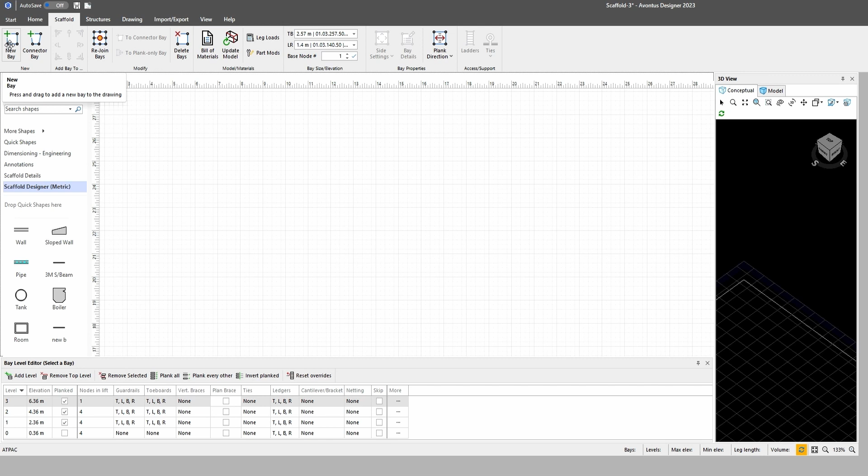To add a new bay, simply go to the top corner, select new bay, click and drag onto your page. This will automatically come out as a 2 meter lift, as well as the size you've chosen up here.

If you change your settings up here, then drag a new bay on, it'll go to these settings. But if you've already added a new bay and want to make it bigger, go into my settings and change it to a 2.5, so it's 257 by 257.

Now obviously when you click off, there's no information here. When you click on a bay, this information will appear - this is everything to do with this bay you've chosen.

I can go in here and add a level. Obviously that's at 3 lifts now, as you can see. I want it back down to 2, so I click on here and it takes the top level off.

All this information here is what is stating within this design here. On your side settings, on your top ribbon, when you click in here, you can turn off your guardrails, turn off your toe boards, add bracing, add netting, and add a cantilever to either side. But remember, when you're using the side settings, this is for the whole bay.

So if I want to add bracing to the left hand side and cantilever it on the T side, the cantilever brackets information's here. So I want a 1 board hop up. If I click OK, now let's look at my drawing.

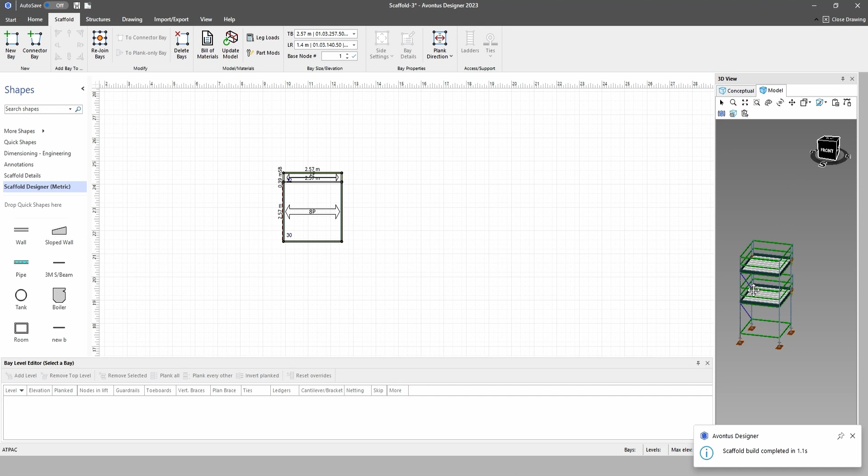As you can see, on the L side I've got my bracing and my hop ups as well, what I've added. So that's the side settings - it's for the whole bay.

I'm going to turn that off now, click OK, so that gets back to normal settings.

For your settings down here, now I have a boarded lift here on my first lift. So what I'm going to do is turn my handrails off on that, which, bear in mind, every time you use a guardrail, it turns off your toe boards.

Now I want every side bracing, and I want a cantilever on the R side. Click OK. And I want netting - I want netting on TLB.

So all I'm doing is changing the settings for my first lift. Let's have a look.

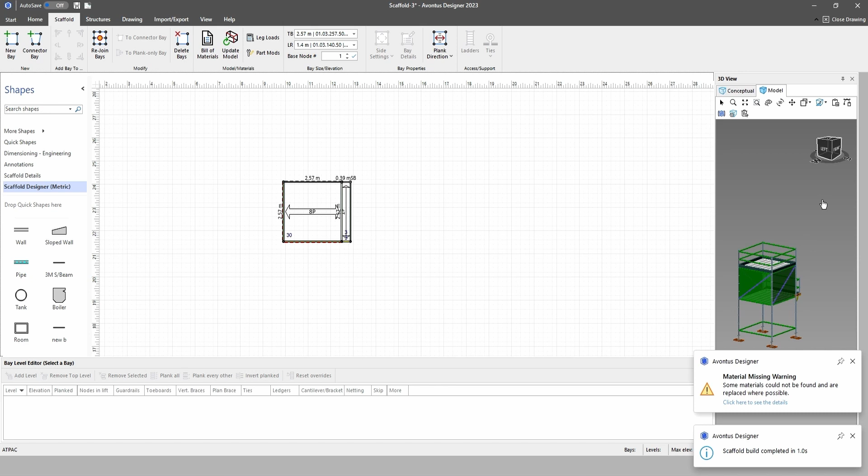As you can see, everything on that first lift - I braced it all the way around, put netting all the way around, took my toe boards off and took my handrails off, and added a hop up.

So everything can be done from this, but what you need to bear in mind is that any settings you change in here will override this information up here.

So if you're thinking, I took all my handrails off, I want my handrails back on, if you go in here it already states that there's handrails, but that's only specifying for the top lift, as you can see. So please bear in mind that this overrides this.

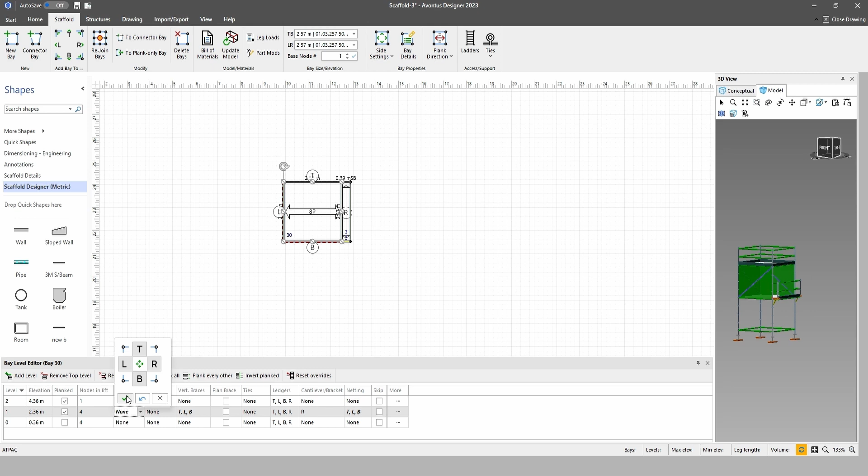Okay, but if you were to change - it's not that one, it's that lift - go in here, click OK. I want to turn all my bracing off, click OK. I'm going to turn that off, click OK.

Turn my netting off. When you click it once it highlights everything, or if you've got certain things already turned off, click it again and it turns everything off. Click OK. We're back to normal, as you can see.

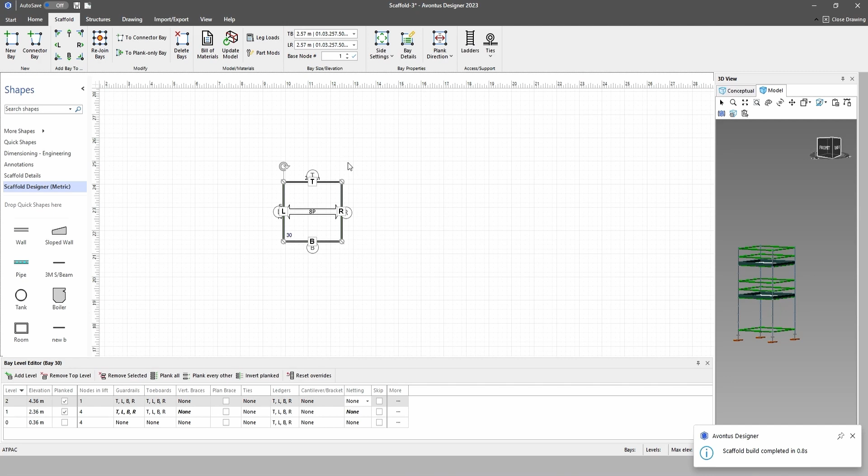Now if I go into here and then turn my braces back on, you can see, because I did bracing the first time on this side here, it overrode - and obviously I've only got my bracing on my bottom lift.

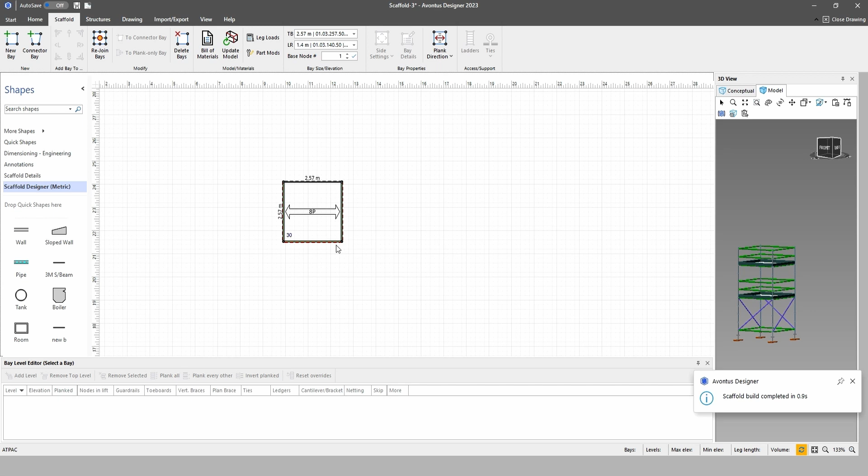So please bear in mind when you come to do that. Obviously now, because I've already overridden this, I'm going to get rid of this.

I'm going to drag on a new bay, change it to the desired size I want. Back to 2.5. So the scenario is, you've got a bird cage you need to do. There's many ways to do it, but I'll show you a basic way which we kind of recommend.

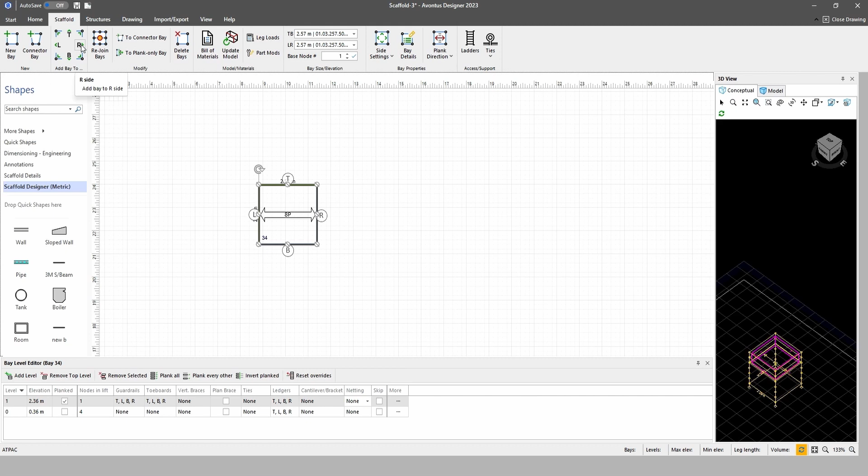Use this feature up here, which is adding bays. I can just click on R, obviously on my R side I want another one. Now on my B side, so that's simply adding bays to whatever direction I want it to go. But bear in mind with this feature, whatever this bay is, it will copy to whatever direction you're pointing to.

So when this is created, I recommend taking it up to the height you're wanting to create your bird cage. I don't need planks on that lift, I don't need planks on that lift. That gets rid of everything. I only want it planked on my top lift.

I'll drag this over here because this is the bay I'm working with. So I can now go like this, add the sizes that I need. Right, so that's my mini bird cage I've created.

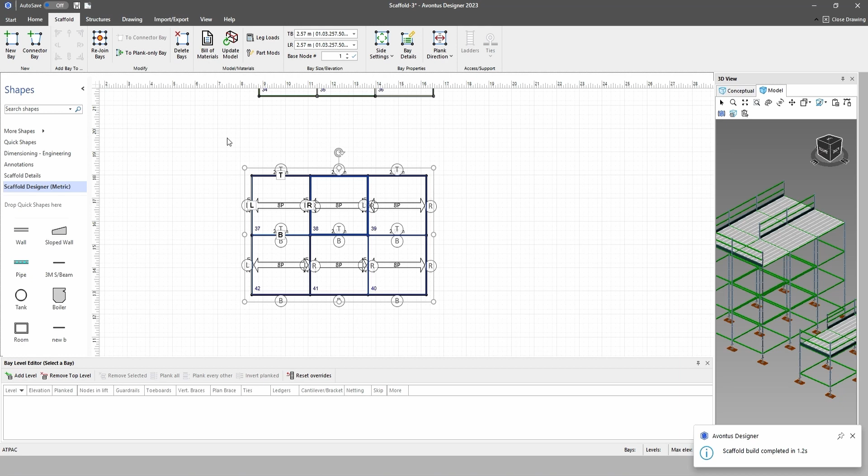So when I go into here now, as you can see, you're thinking well that's a bit of a mess, I didn't want it like that. Highlight everything, re-join bays, back into my model view. And as you can see, it's put my handrail all the way around.

But you're thinking now, well, I need bracing in there. I need bracing in that one. Just simply go into side settings, bracing, and I'm going to brace this one as well. Oh no, can't leave it, I want bracing. Click OK.

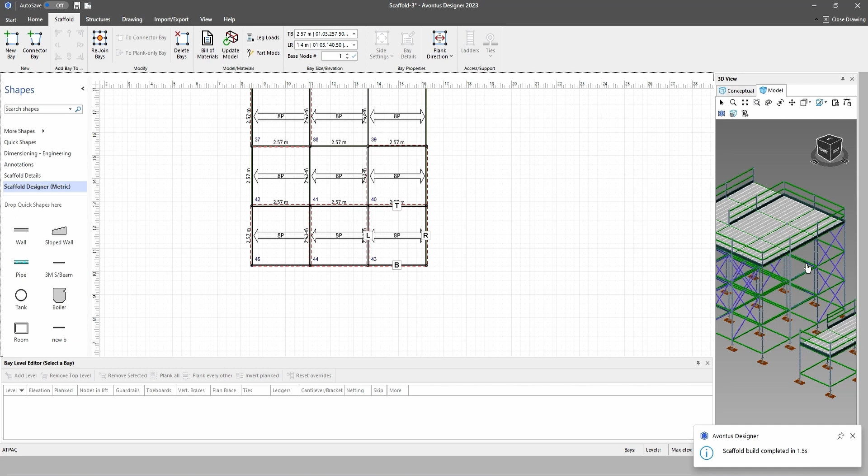So now I've got bracing in this one, I've got bracing in this one. Now, if I were to click on this one and then I was to go, I want another bay there, I need another one there, and that one. Now you have the issue, because I've copied them bays - where are we? I need to be on the back side.

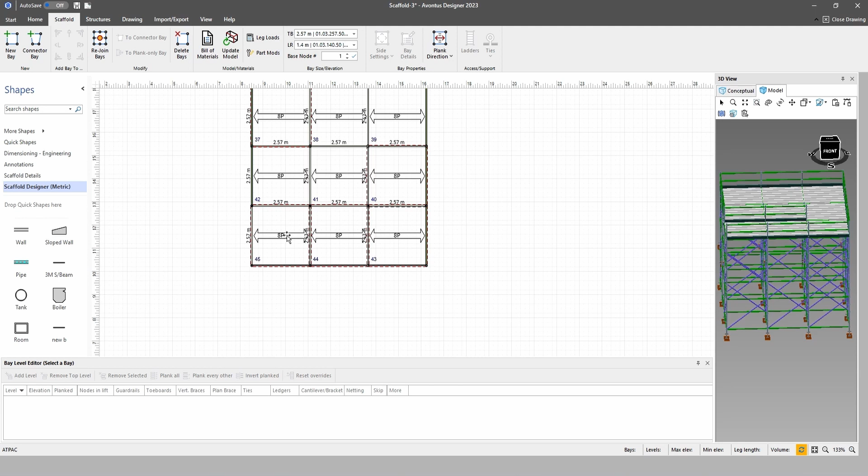So now all these bays I've created, what I've copied, I've got all the bracing in, which I don't want. I don't need it with bracing every bay. So what I'll have to do now, because I've copied all that bay, is go in here and say, right, in this one I don't need bracing, I don't need bracing in that one. It'd be very tedious if you created a really big bird cage.

Bear in mind, this is only a small one. If you made another 30 bays wide by 30 bays, you would have a lot of bays where they'd all be empty. So what we recommend doing then is, imagine this is 30 bays wide, 30 by 30. What I can do is click on a bay here

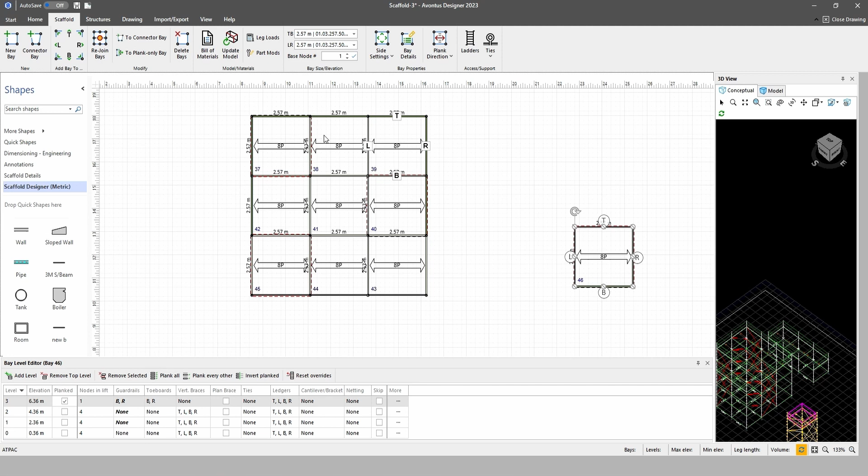and then add a bay, drag this to one side, create this how I want to do with my bracing. So I'll go into my side settings, add my bracing. Bear in mind, all these have got no braces - this one's the only bay I've created with braces. What I would do now is make a few of these, because I'm copying this bay. And then where I need my bracing, like I want bracing in the middle, drag this bay out.

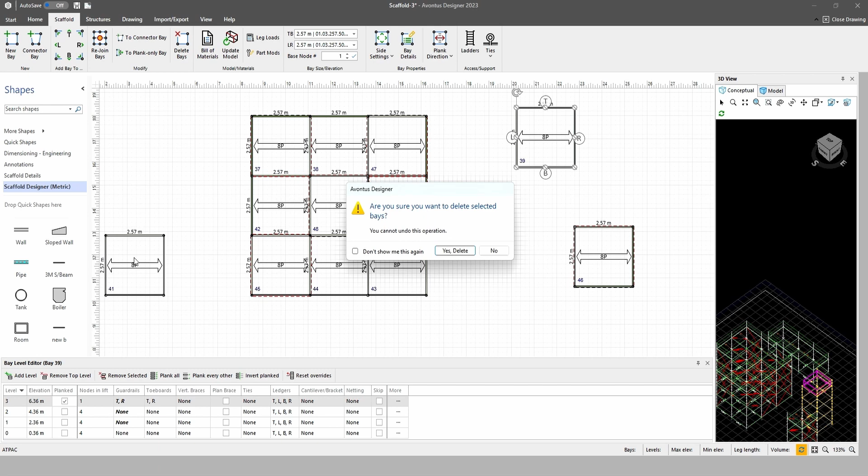Drag this in. Do you understand? So basically all I'm doing is saying, right, I've created these, I need to swap that with that one. Get rid of these bays. So I don't need that bay anymore. I don't need that bay anymore.

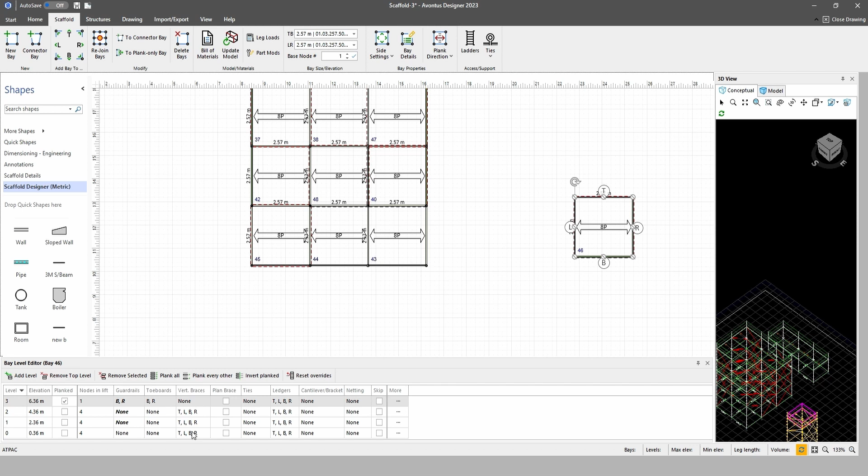Yep, so now I've created my 30 by 30. I've got my braces where I need them. It's just a simpler way than going in and saying, right, I need... Because the scenario is that if you're only wanting bracing on the first lift, second lift, but you don't need any bracing after that, then obviously you wouldn't use your side settings. You go click your bay, and then you go in here and change your bracing to whatever you needed.

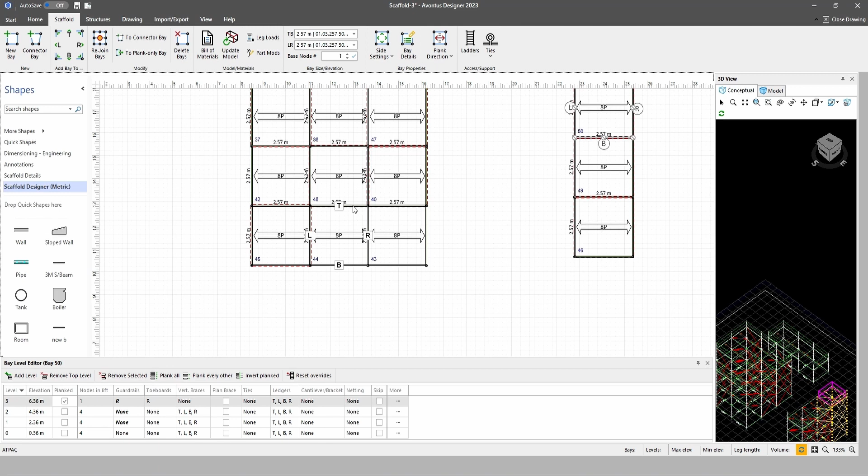So that would be perfect for what you need in here. Then having to click in this bay, change the settings, go into this bay, change all your settings, going into this bay, changing all your settings. You create one, and then all you're doing is clicking on here, using that, making a couple of them, take out what you don't need. I don't need that one, and drag and drop in place. It's as simple as that.

So, get rid of them.

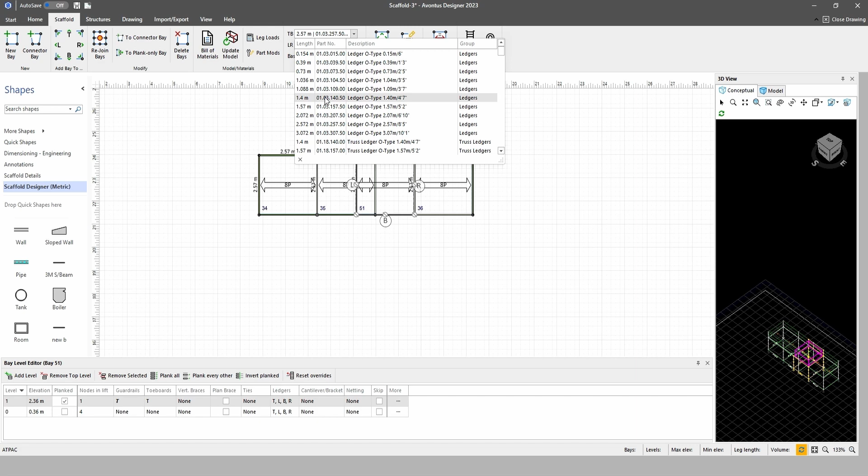So now on another scenario, basically I've got a gap. I've gone round a house, I've got a gap here, and instead of me creating another bay like this scenario, what a lot of people do is go through here and try and find that bay to try and fit within that gap, still not there. 2 meters too big.

Right, so instead of doing that, what you can do, get rid of that. What I can do now, because I've got these two, but I need to make this up here, but I don't know what size it is, I can drag in a connector bay, and then drag that into situ, drag that arm over there, drag that over there, drag that over there, and that over there. So come out of it, I can see straight away that it's blue, so therefore it's added tube and fit to make that gap up.

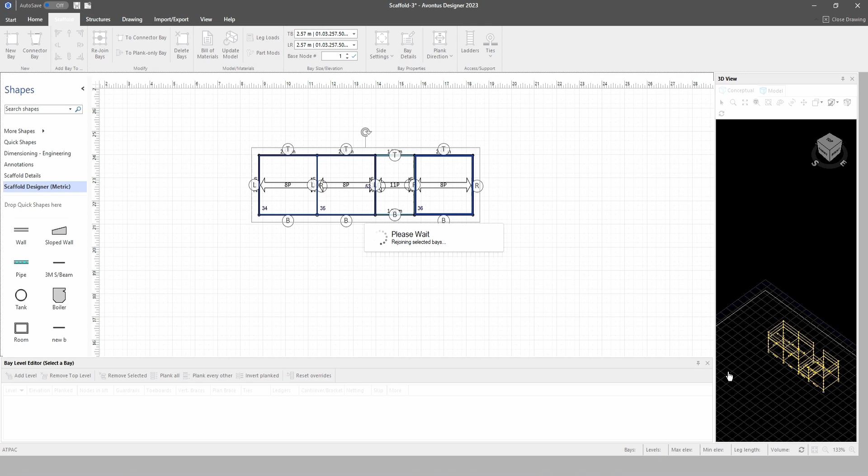Okay, so just click on rejoin, and then let me go in here. So I've made my gap up, but now you're thinking, well, it's way down here, I need it up there. So what you can do, because this will just come in as a standard platform...

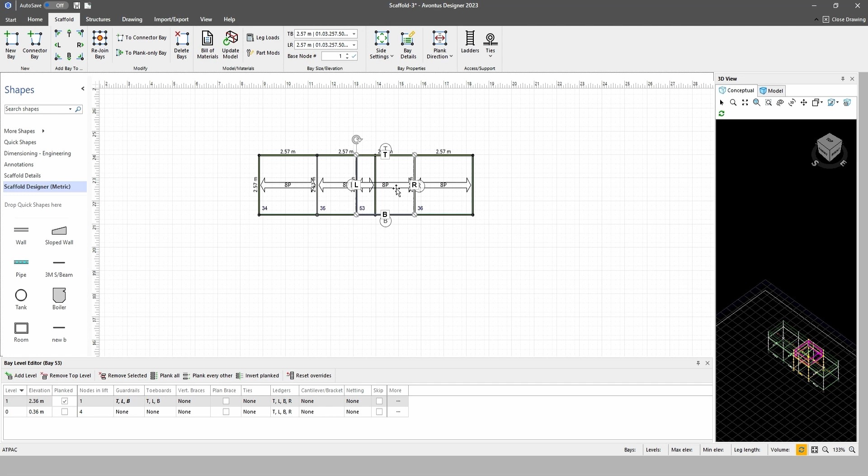Delete that there. I can click on L, drag it away, convert to connector bay.

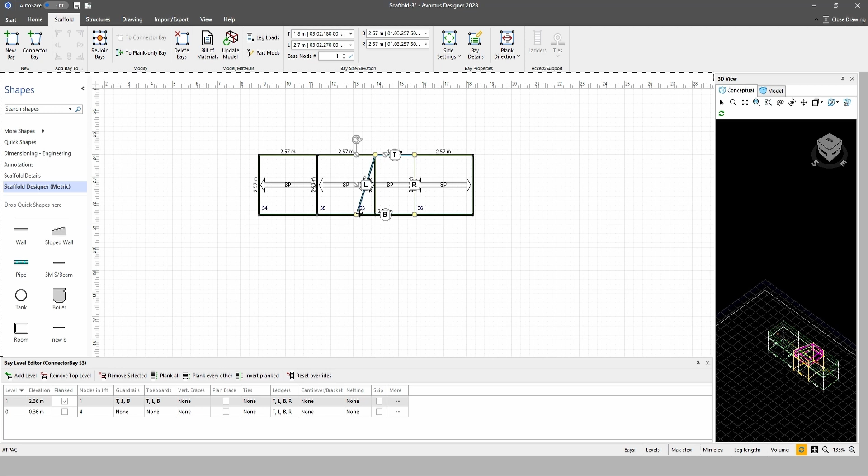So basically that is this here, but this is already at my desired height. I can now drag this into place, click in here, drag my legs in place, and now highlight everything, rejoin bay, go to my model view, and now I have a full bay connected up for what I need.

Yeah, it's tube and fitting, but obviously it's only come up as tube and fitting because I do not have that kit available. I do not have a ledger that is 1.74, so it's put me tube and fitting, but it's created my board level, it's created everything I need to connect them bays up to make that perfect board level.

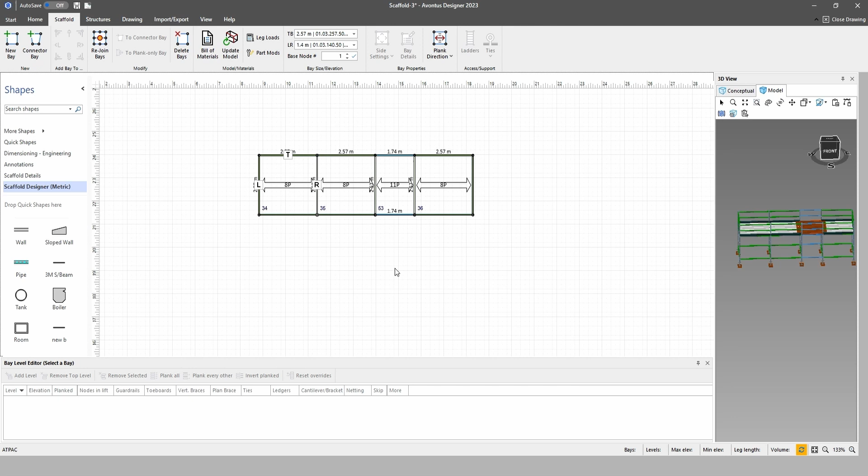Okay, the other scenario is as well, when you click on a bay and you want to use this as well, you have a corner bit. So if I've got a house here and I need to come round, I click on here, that is this point here, and then it adds in a corner bay for me. So it automatically has a bay in corner and then sends my L shape going round. So I can now continue.

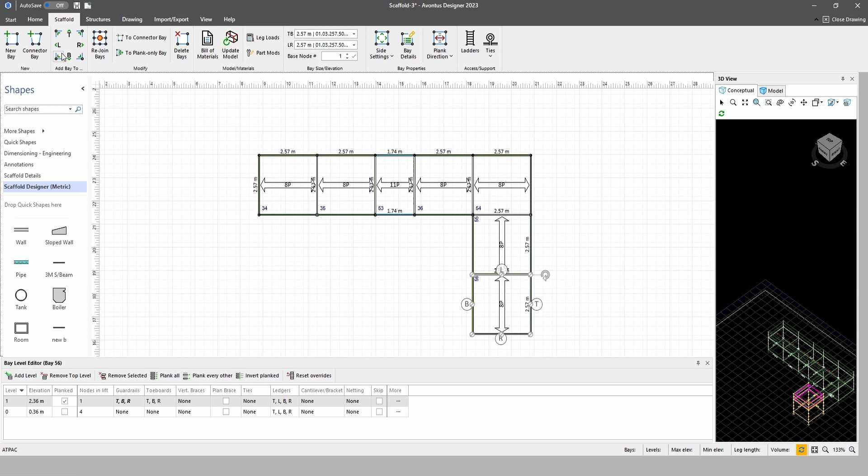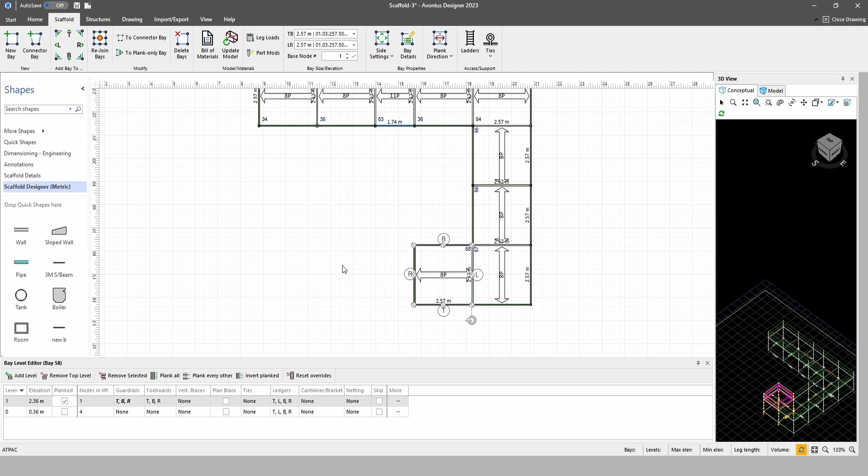Now this is my R, so I continue, and then I want another one on my B and R side. So click on there again. It swings it round again to go round any shape I need. That's just a quick feature. Obviously this continues as your board lift height. So whatever you create first, always create your bay first to the desired height, what you need, and then obviously you can use this feature.